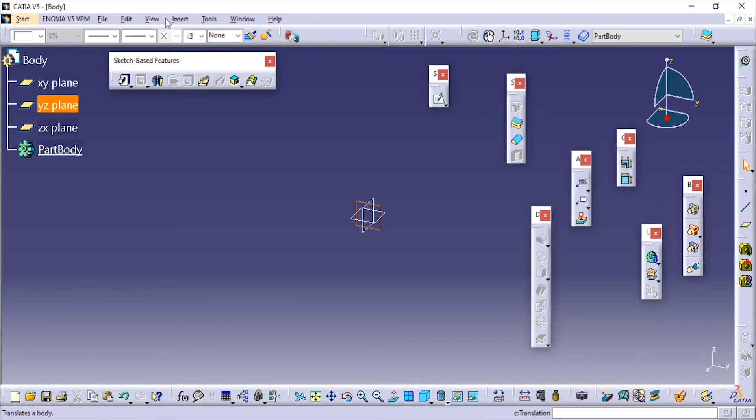If you are not able to see the sketch icon over here, it will be here in the right or in the top. If you are not able to see it in either of these, you can go to insert, and there you'll see an option called sketcher, and then click on create sketch.

And here we are going to use the revolve tool, so I'm going to make only the hatched portion and then use the revolve. So we'll be making the half, and now itself I'm going to add this dimension, and the bottom outermost dimension is 140. Since we'll be making only half, it is 70, and this height is 20, and this diameter is 100.

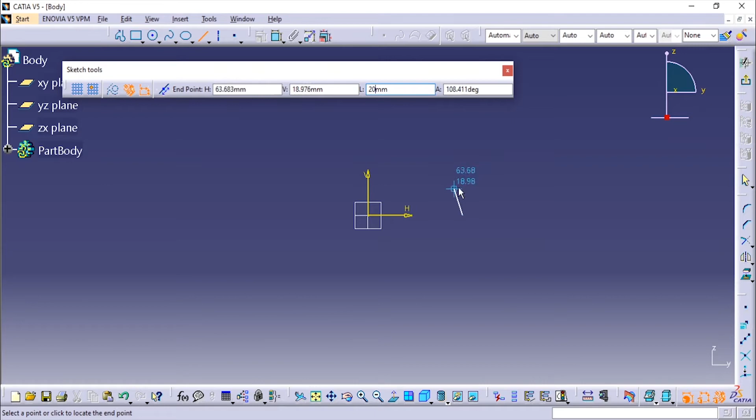So I'll just specify the horizontal point as 70. Okay, and I'm going to start from here, and the length I'm going to specify as 20. And from here, okay, I didn't double click on that, and from here I'm going to enter it.

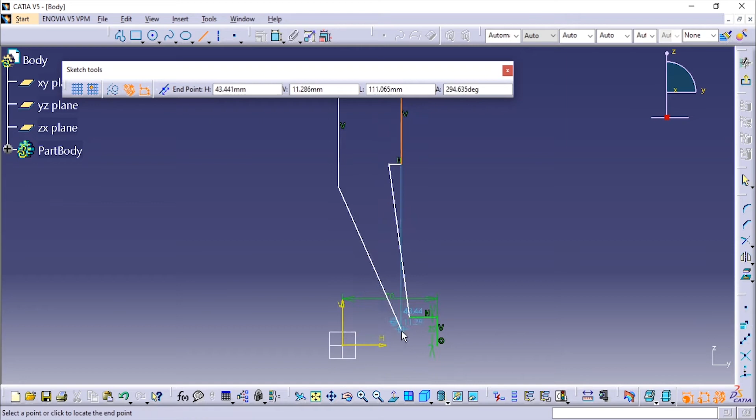And first I'm going to draw a rough sketch over here. Later also you can add the dimension, or you can add it simultaneously as I showed before. And we'll do this down part, the bottom leftover thing, later.

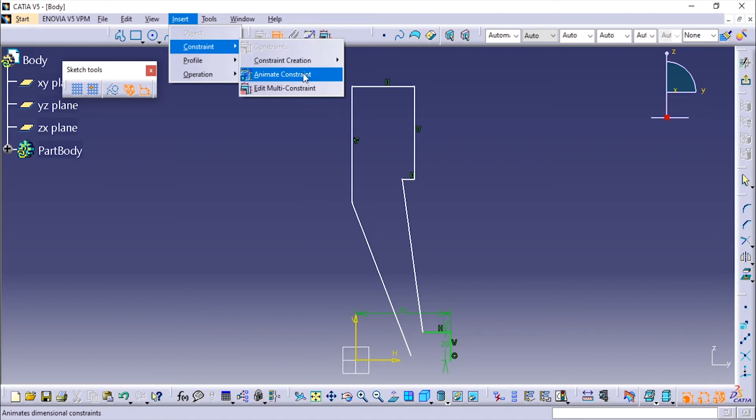Now we will add the dimension by double clicking on this icon. If you are not able to see this constraint icon, go to insert and constraint, and you can see the constraint creation, and click on constraint.

Okay, and I'm going to specify the point from this to this, and they've given the diameter to be 100, so half of it will be 50. And from here till here also they are specified. Okay, we'll double click on this, and from here till here they are specified. They are given it as 66 in diameter, so half of it will be 33.

And this height they are given as 40 mm, and the outer diameter is 70, inner diameter is 50. So height is 40, and again I am going to add the dimension from here till here. It is the outer diameter, they are given it as 70, so half of it will be 35. And I'm going to move this little bit inward.

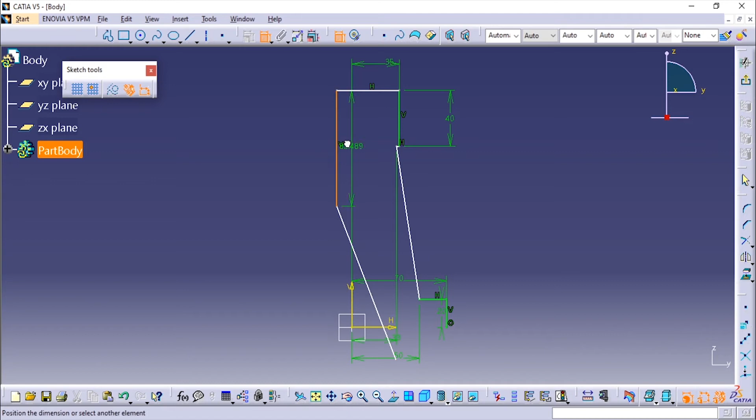Okay, and now I'll add the dimension. I'll add it from here till here. The inner diameter they are specified as 50, so half of it will be 25. And the total height also they are mentioned. The total height is 185. And I'll move these dimensions to the bottom and outside of the sketch.

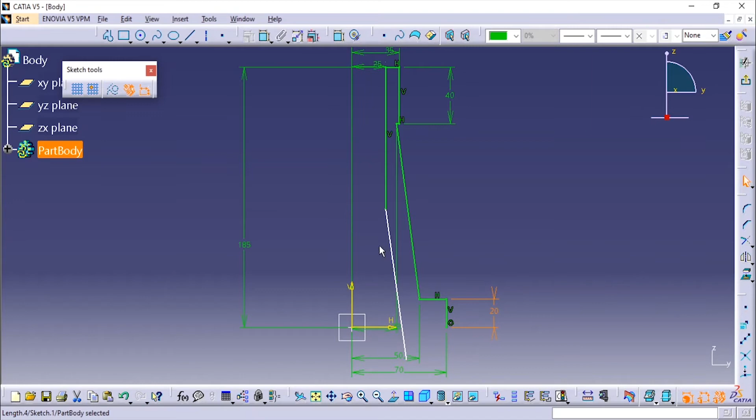And now we'll make sure that these two lines are parallel. For that I'm going to select these two lines, and here you will see an option called constraints defined in dialog box. So you can just click on this, which is available here or at the bottom. If you are not finding it anywhere, go to insert, and in the constraint just use the option constraint, and I'm going to use the parallel.

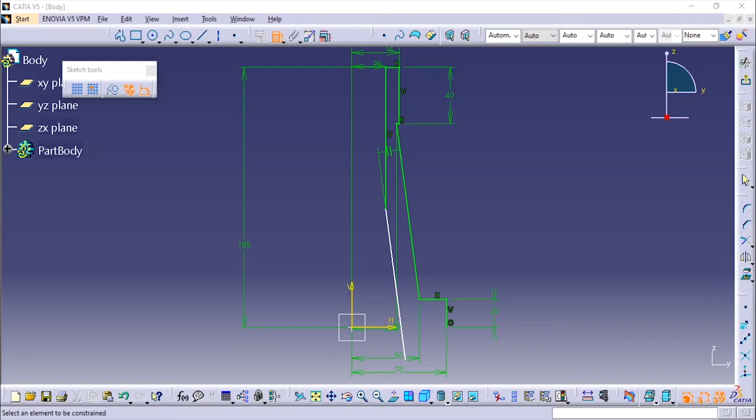Okay, and I'll specify the distance. The distance they are given as 10 mm. And now I'll just continue with this bottom part.

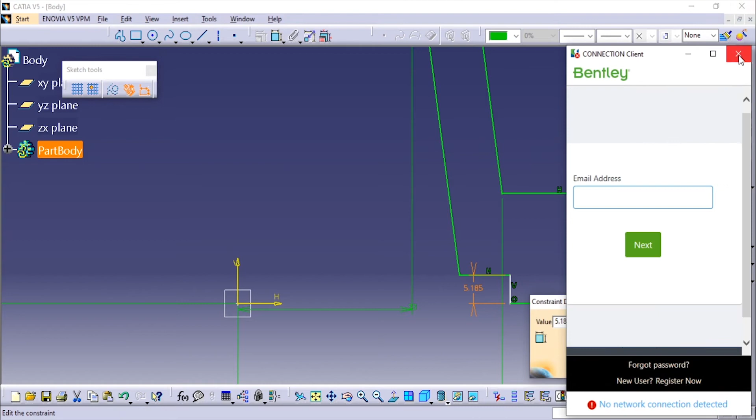They've given the depth of this, and I'll add the constraint for that one. Height is 3 mm and the diameter is 100 mm, so half of it will be again 50. So 3 mm, and again I am going to add this from here till here. It is 50.

Now you can see that all the sketches are in green color, which means that it's fully constrained. But sometimes all the lines, all the sketches will be in green color, and sometimes it will be unconstrained. So to check that, here you will see an option called sketch solving status. Go here and you can see that it is iso-constrained, which means that the sketch is fully defined and it is a properly closed profile.

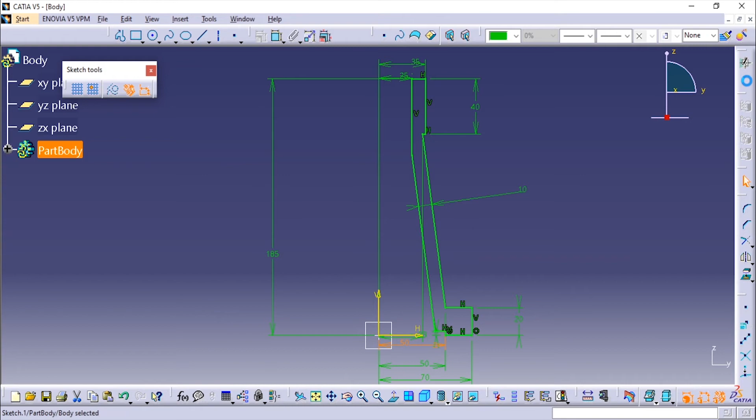And we'll close it and exit this workbench. And now here we'll use the shaft option. In other softwares there will be an option called revolve or rotate, but here in Catia the option is called shaft for making it rotate.

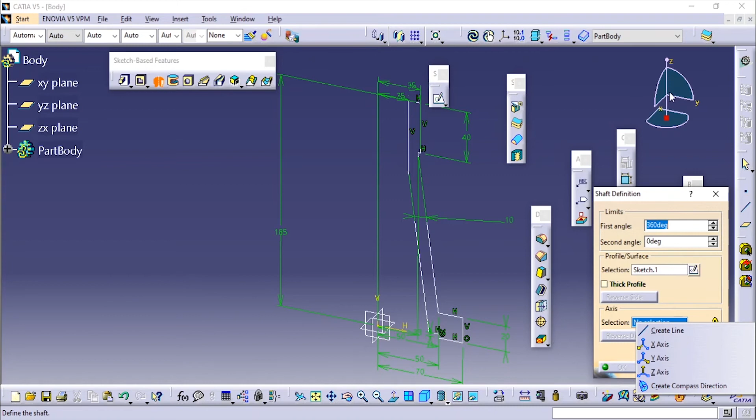So by default the sketch is selected now, and I'm going to choose the axis. If you have not created the axis, no problem, you can create it if it is not coinciding with the center line. By looking into the Catia compass, select the appropriate axis. Now you can see a full preview, and here you can change the angles. You can just play with it, and then we'll click on OK.

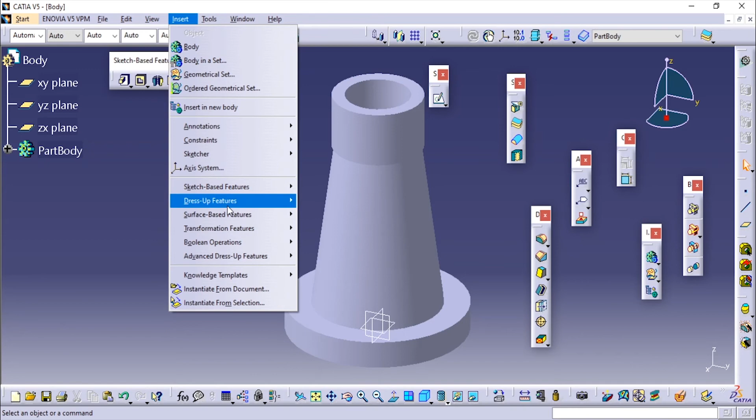And now we'll add the fillets. Here also you'll have an option called fillet. This is the edge fillet, and this icon is the chamfer. If you're not seeing this, just move this apart and check it, or if you're not finding it anywhere, go to Insert, then Dress-Up Feature, and here you'll see Edge Fillet. Go to edge fillet, specify the radius and select the edge where you need to add the fillet.

Here they have not specified the fillet, so it will be 1 mm, as here it says unless otherwise stated dimensions in mm, chamfer is 1 x 45 degrees and radius is 1 mm. So it will be 1 mm over here, and this one is 8 mm. Here also they have not specified the radius, so it will be 1 mm.

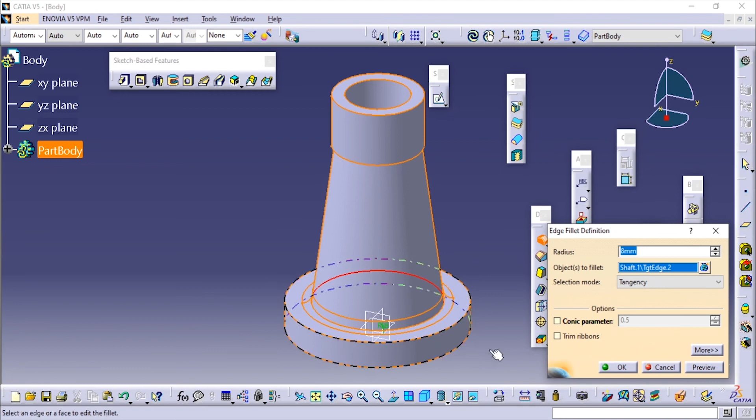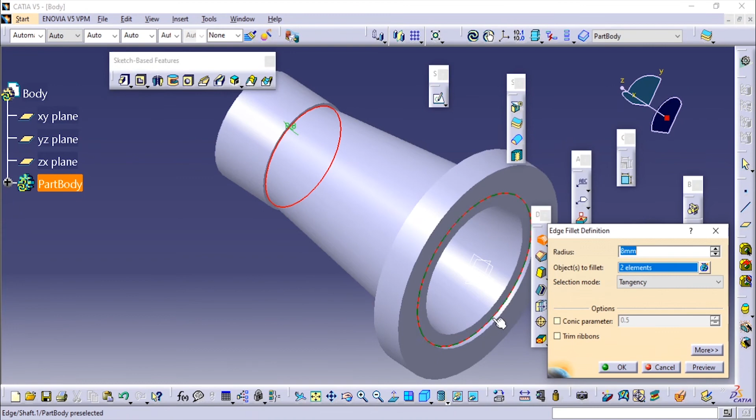So first we'll make the outside fillet, that is 8 mm, and I'm going to select, and I'll deselect it, and select this proper edge, and we'll just have a preview and then click on OK. And now again I'm going to use the fillet, and select this edge and this edge of radius 1 mm.

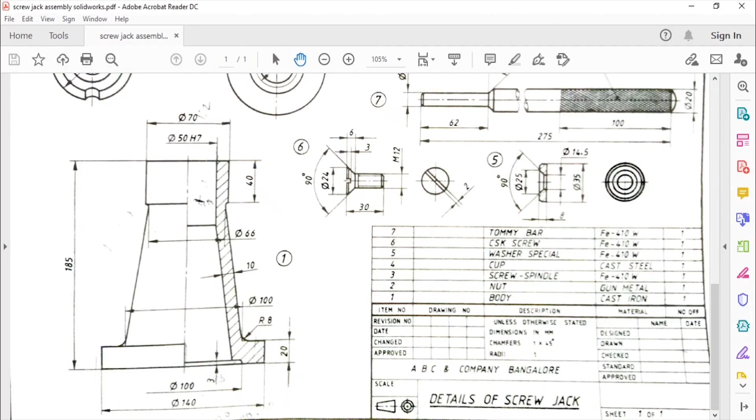And now we are done, and we'll add the material so that it will appear in the bill of materials when you do the drafting. You can find the link in the description where I have shown how to add and create the material for a part. So I'm going to add the material, and the body is made of cast iron. Okay, cast iron is not available, iron is there, that's fine, we'll add that one itself.

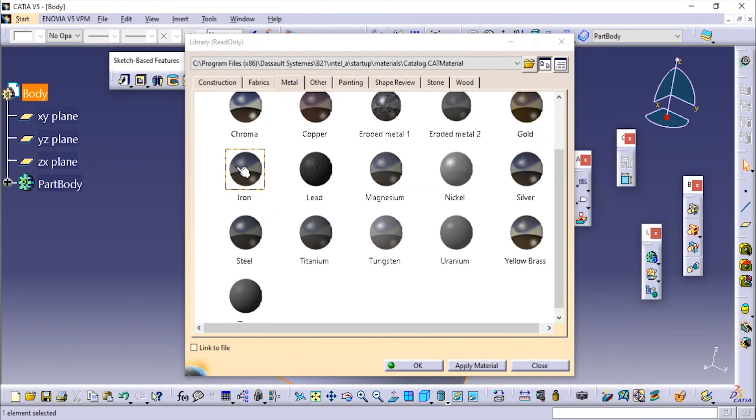I'll apply it at the top level. I'll select this and apply material, and you can see the material has been applied. If you are not able to see the material, just change the viewing option over here and enable shaded with material. In other views it will not be shown properly, so just go to shaded with material.